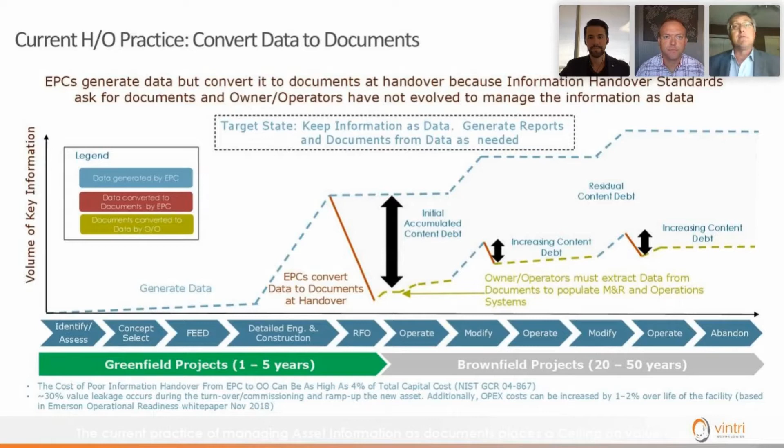To the point that was just made, there's huge value of transferring the data. We actually have one of our major customers that recently brought this up as a topic - it was an unexpected advantage.

Vintri has always been helping their owner-operator partners with making sure all of the supplier data comes in, it's consolidated, then put into a single ledger so we can audit it with our proprietary algorithms, check it for engineering conformance, check it for traceability, all that stuff.

Then we make it available to anyone and everyone in either a flat file format like an Excel spreadsheet, which is simple but easy to upload into other formats, or our platform core is API centric, so it's designed to go and fit into other programs that can pull from it.

So finally, we're starting to get more and more feedback from our customers that they're realizing the benefit not just of having accurate and accessible data, but also what was just discussed - they're not losing that information as they transfer it from one solution to the next.

We're very fortunate that we've known VEERUM for quite some time, but there's a lot more customers starting to poke around and ask, well, how would you transfer your information into a platform like VEERUM? How does it go there?

Based off of the value Arnout was just talking about, that's our goal here - to quickly show you the data. Our lifespan visual that's up right now quite relevantly reflects what was just there. We're going to show how the data can go from the full lifespan, from manufacturing through construction and then over into operations.

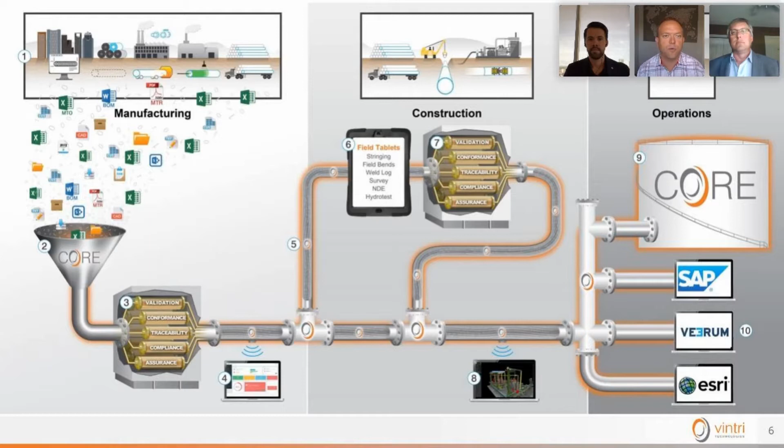For some of you in the audience, there could be an OpenText logo here as well, because we're working with that team to make sure all those documents can be accessible in all formats. So with that, I'm going to take us through a slab or a coil right through to the welded asset and show that to you through our platform.

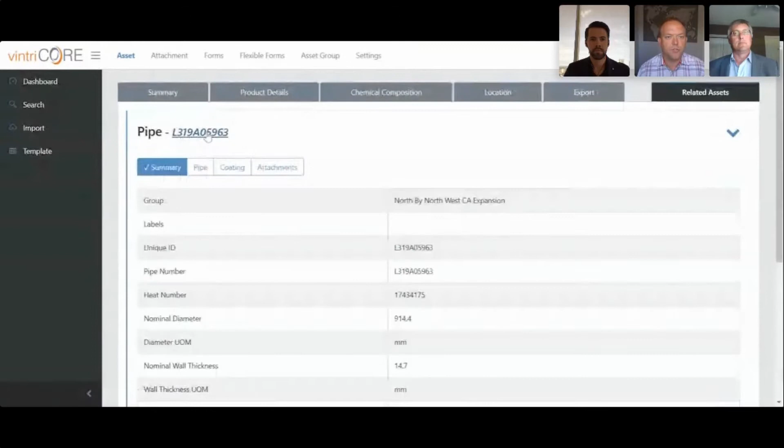So we've got a summary of our steel that we looked up, and we've got our different assets. What we can look for from here is our related assets. So from that steel, we're going to go into the pipe and show it at a quick glance related to the steel, but also we can go into the direct asset.

In here, we have the summary of the asset. We have its pipe information. We have its coating - it's part of a double joint, so we'll show that in a second. We have its ability to export, as it was described. It can go into that PDF format, which of course would lose so much valuable data, but it can also go into the Excel flat file, or it can be pulled directly via API.

And from a related asset standpoint, now that we're in the individual pipe, we also have its double joint that it's a part of. We have its steel raw data that belongs to it, as well as we have the weld for it.

So quickly, as I catch my breath, because of course the demo can never go perfectly right, I want to show quickly on the steel side, we have both the actual heat and then the pipe details for that.

So in there, in a quick view, while I'm still in the pipe, I can see my product details, my chemical comp, I can see my tensile, my impact, my drop weight, my hardness, all that different stuff. But I can also, if I want to see it at a glance while I'm in the asset, I can actually go into that specific asset.

So I can dive into the MTR data and get right down to the micro. And of course, what we're talking about for the overall example is not having to get into this much detail and not having to put this much information into a system like VEERUM, but have it over here in Vintri Core so that it's accessible.

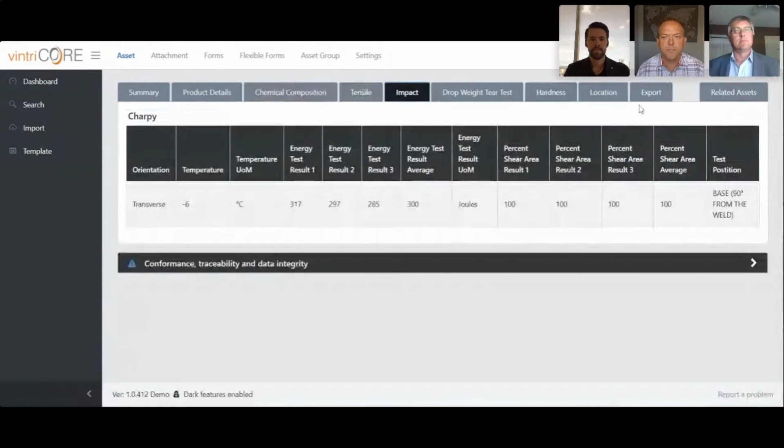But realistically, you can have a few key tags within a system like VEERUM that link back to all of this critical micro information. So within the actual asset, we've got the digital MTR broken down, searchable by whatever we need to find at different times. And then we go backwards, back up into the asset so we can look at the different information. So at the pipe level, to the point of documents versus data, we can see...

We've got a hydro test, if there's an NCR to it, the original ITP that belongs to the asset, which can be mass uploaded, any photos taken, and of course that MTR as well. We can see...

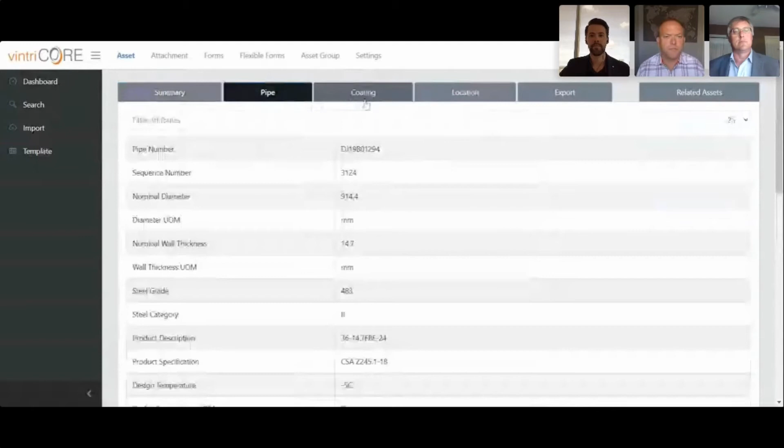Go into one more layer, we'll go to the double joint. On the double joint level, now we've gone from steel, up to the pup, up to the double joint. On the double joint we've still got that pipe information, but now we have the coating information, because once it was a double joint, then it got coated. So we've got our coating information.

We're not going to move this pipe, so we're not going to show the location map, but any stockpile information, any geospatial information associated to the asset can be associated either in a location chart or overlaid onto a simple Google Map overlay. Again, we're exportable in any one of these formats.

And finally, we'll go one last chance to look at the different assets. And when we look at this asset specifically, we can see the final layer, which, going from steel, raw coil, right to installed asset, is we want to be able to see the weld. So we can dive into the weld information that put that asset in its place.

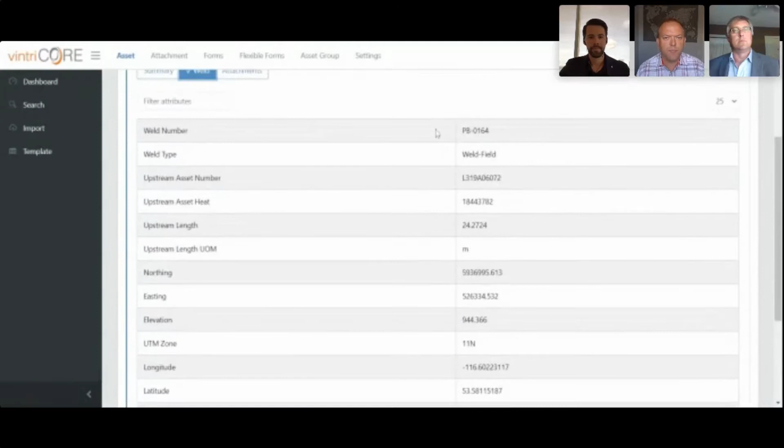And so we've got our quick summary, just a summary of what weld log information was available. And then in here we can have attachments. This has got a photo of the weld, but the inspection test plan, or more pertinent, the weld procedure, can be added there. So that's just some of the glimpses of what's available there and how this will all go in.

The key to a major component with the Vintri core system is actually the translation of it. So what we have from a translation standpoint is the ability to bring in the entire map of all the different supplier data and translate it over into a common, standardized data model.

For all those from the operator standpoint saying, well, that's great, you put it into one model like PODS or an Esri model, but our organization doesn't work like that, or we have our own nuances, this can translate the micro data into a common data model, but then also translate it into your common data language. So for all that usable data, we make sure we take all the supplier data and translate it into one common language, so that supplier A, supplier B, supplier C now are giving you usable data in one format. And then you can translate that further to your nuances, your systems languages, so that you don't have to do the huge change management.

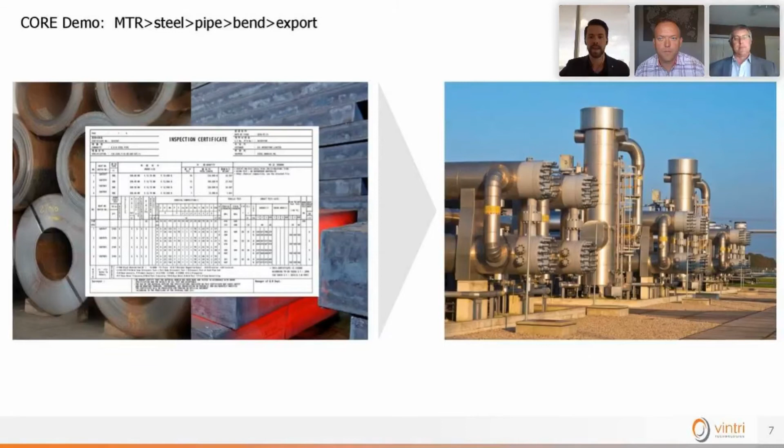So yeah, thank you for the introduction and a brief overview as to how we can actually start maintaining data through the asset lifecycle, from engineering and construction all the way to handover and operations. And there's one piece that Arnout and Jeff mentioned, and it's all about how do we actually relate information through unique tag IDs, so that they can actually be aggregated at scale and brought into the context of a 3D visual model and made accessible to the whole project team.

And so this really starts in the early phases of engineering and construction. And when you're working with some of your different suppliers, whether they are manufacturers or an engineering firm, helping establish some of those standards from a unique ID and tag management standpoint.

And ReVisionz, I'm glad that they're able to join us on the call today. They're a leader, I'd say, in our space in terms of creating those tag registries and really that asset information management system, where we can actually link information from various sources of databases, whether they be CAD systems, GIS systems, material traceability systems like Vintri, or content management systems like OpenText, and maintenance management systems like SAP PM or Maximo. And so really what we're doing is bringing all of that data together, both through unique identifiers and also through user-created objects, and linking them to your 3D CAD model and your reality scans.

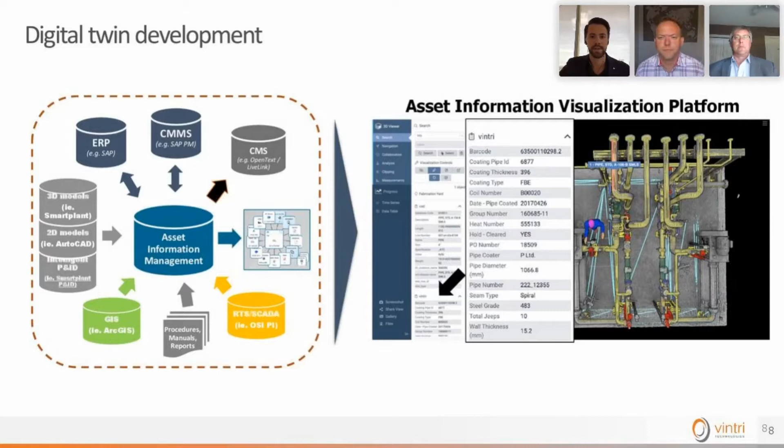And so I'll share my screen quickly here just to show you how this looks through a live demonstration of the platform.

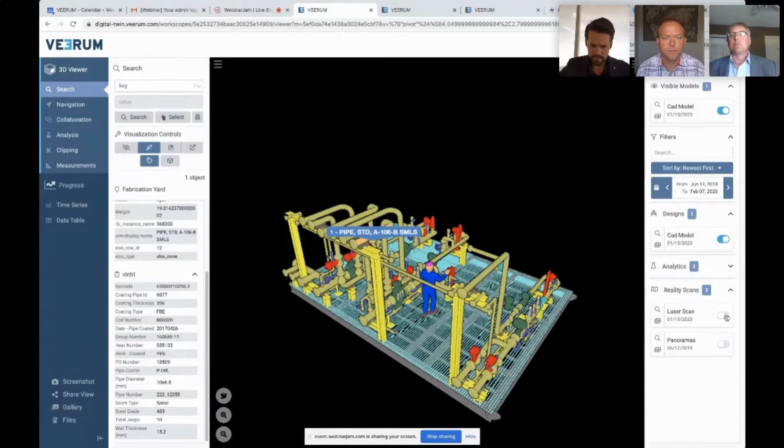As we start executing our project, we'll start ingesting different scans and survey data from the field. Here you'll see there is a laser scan of this same component. And it's worth noting, as you start handing over this asset from engineering and construction into operations, all of that metadata resides in the model.

I think it's quite common across the industry to do our best efforts in maintaining as-built, but maintaining three-dimensional as-built in terms of the CAD model becomes quite difficult and time-consuming because you need to update your CAD model whenever you make a modification from a maintenance or brownfield expansion standpoint.

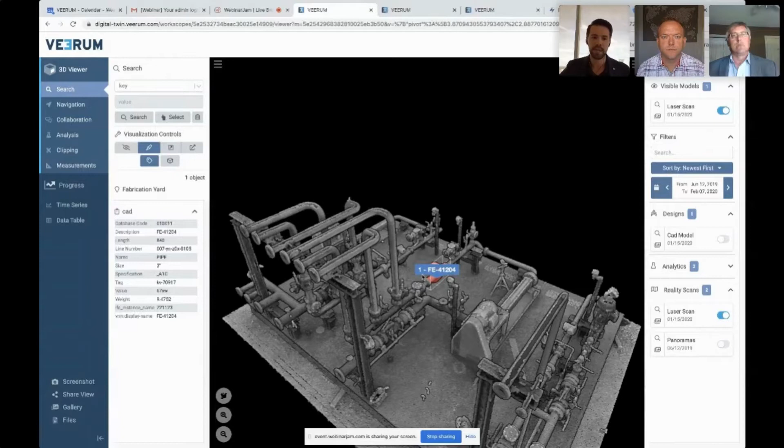By actually translating some of the object properties from your CAD model onto the laser scan, you're able to rescan your facility at periodic intervals and actually maintain a lot of that asset information, and really use your laser scan a little bit more as an intelligent three-dimensional as-built model, which can be used for a variety of applications.

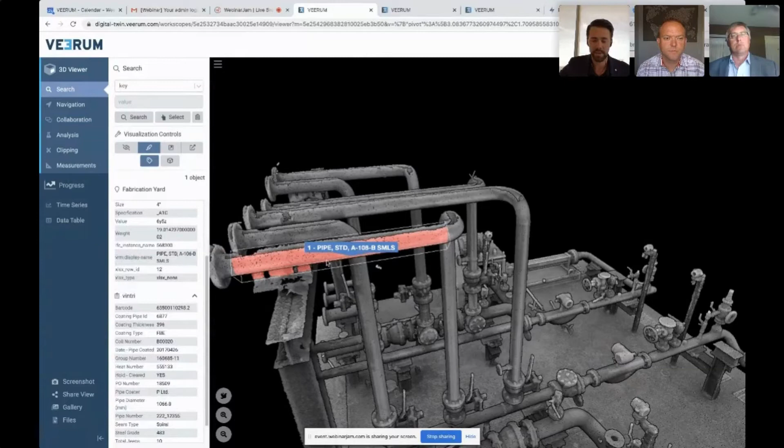You'll see here, on some of this piping, we've got some Vintri data as well, some of the material traceability, but data can come from multiple different systems. So here on these flanges, this particular client has a different flange management system. So we're also able to bring in different data from different sources of information.

And what's key here is that it's information that resides as data and key value pairs, so that it can be analyzed at scale across your asset.

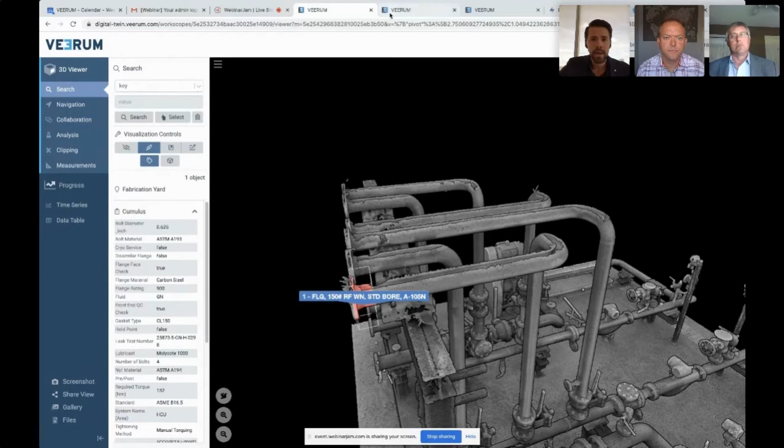What I'm also most excited to show you guys today is our latest development and feature, which we are calling user-generated objects. So one way to link all this information is, again, through those unique identifiers, through those tag IDs.

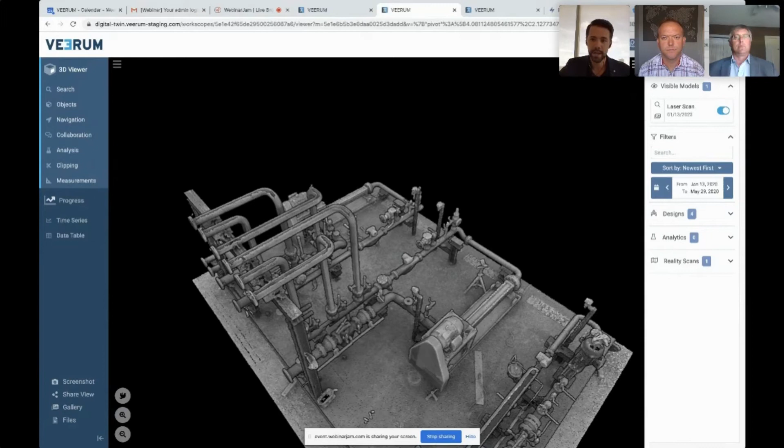A lot of our clients say, well Alex, I've got an old facility. It was built in the 1900s. We don't have a good CAD model. We do have two-dimensional asset information in our databases, but it's not linked to any 3D reality. So I'd like to show you a little bit how you can actually use this laser scan as a starting point in your three-dimensional as-building process.

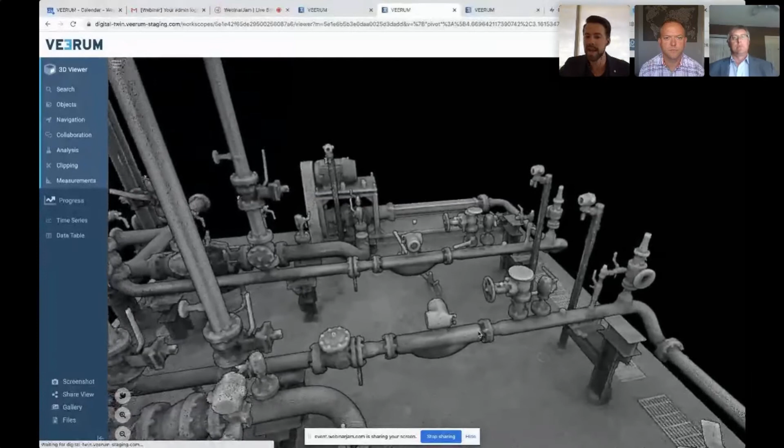The typical process is you do a laser scan, you hire an engineering house to convert this into a Revit model. It might cost you multiple millions of dollars and about 6 months of time. Why actually go through all that additional step if you can actually use the laser scan as your three-dimensional XYZ coordinates, and then assign properties and link it to your asset information management system.

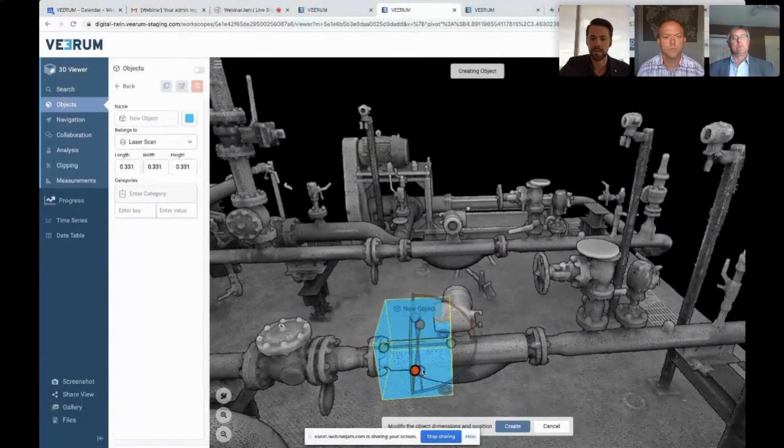So what I'll show here is really the ability to create your own objects and properties within the model. So here I'll essentially create a bounding box around this flow element and isolate this as a particular object.

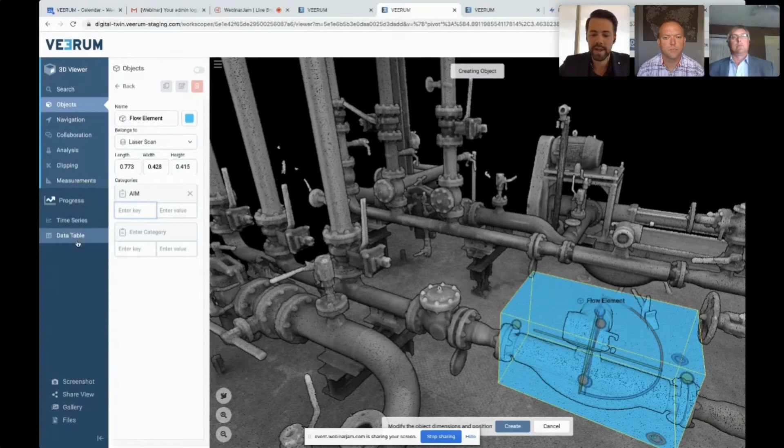So I can then create this object and save it. I'll call this flow element, and maybe call this category asset information management, and add a variety of key value pairs. I think the most important one is, again, that unique tag ID. So I'll do tag 123 just as an example, and I can create and actually save that particular object.

So that it can be analyzed and tied into the rest of your asset information management system at scale.

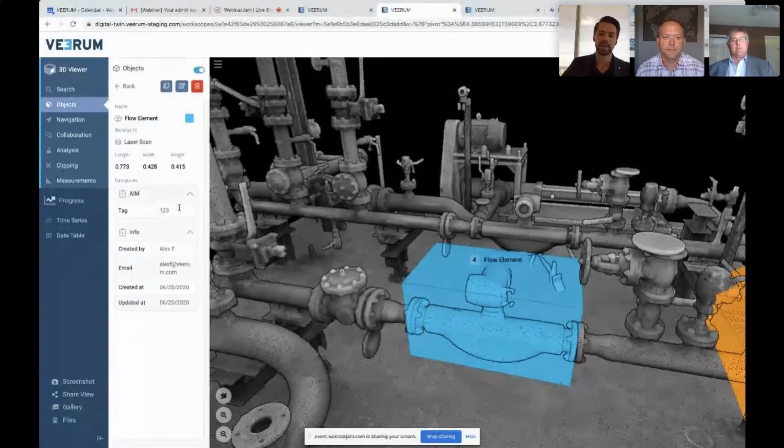So if you have your unique tag ID, you can go through this exercise relatively quickly, and we can use a variety of different object classification and manual methods to do that. And then query your databases, whether it be Vintri, SAP, Maximo, or OpenText, and actually pull all of the information from those related databases into the model.

So what I'll show here is just a couple other examples. Here we've got a pressure gauge where I've actually pulled some data from an IBM Maximo database, and this is just some work order data. So we've got location of the site, we've got an image we can view of that specific pressure gauge, we've got some attachments—maybe this is the original equipment manufacturer manual, maybe this is a procedure, maybe this is an inspection test plan. There's all sorts of different documentation we can bring here.

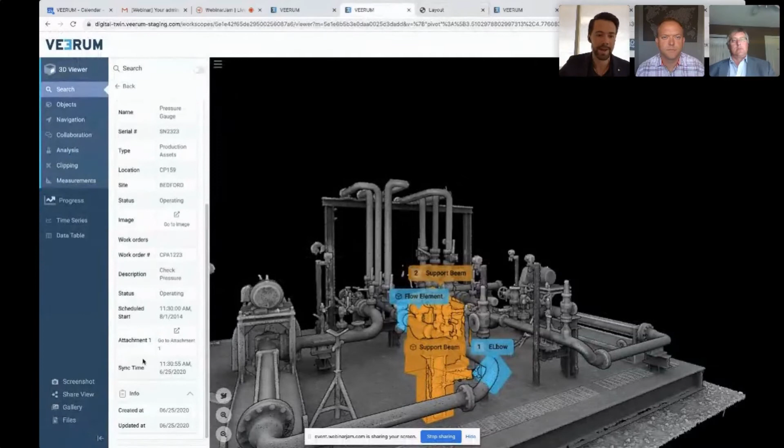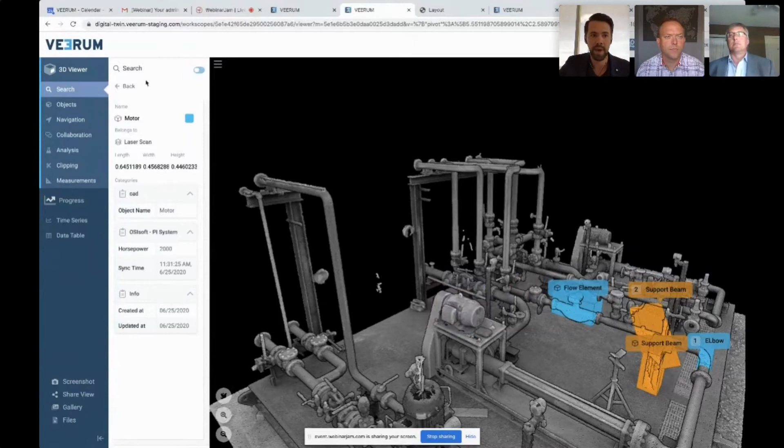Again, this is configurable through a variety of different systems and integrations. Here I've just selected a motor from the drop down, and here I can see some real-time data actually coming in from an OSIsoft PI System, so a historian on top of your SCADA or DCS system. And again, all of these can then be saved as properties so they can be analyzed at scale through the model. So there's one very automated way—if you've got a great asset information management system and some existing CAD models, we can link that all together and put it in the context of the reality scan and some 360 images and photos.

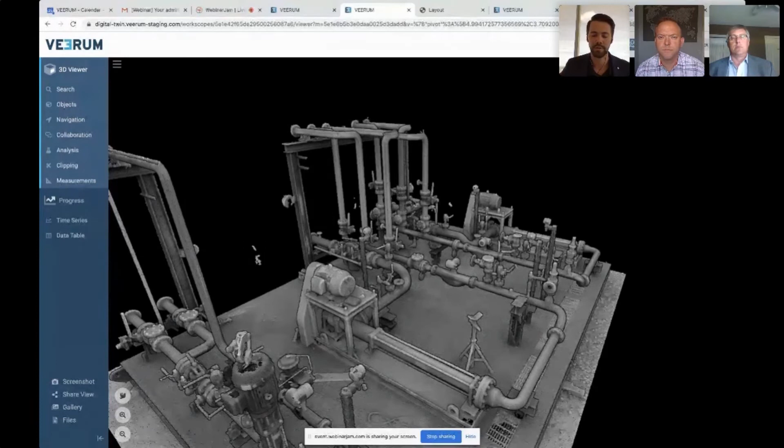But if you don't have that same quality of asset information, that doesn't mean you can't get there through your digital journey and your digital initiatives, starting to link some of this information piece by piece. And I think you'd be amazed by how much you can accomplish in just a couple months' time.